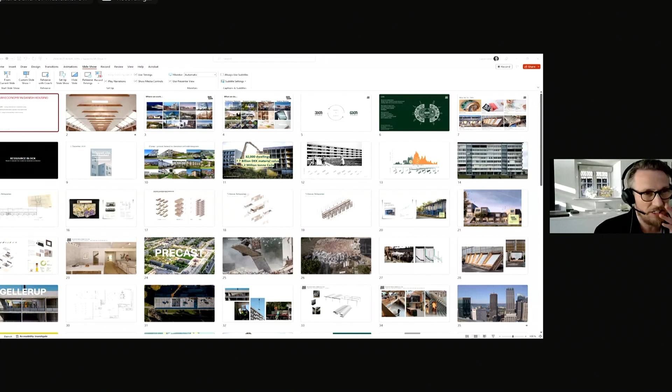Okay, thank you for inviting me, I will aim to be pretty fast here. Do you see my screen now, or my slides now? Not yet. Let's take a breather, we'll get there. I think we're seeing your screen, but not your slides. Let me try again. Here we go, Teams interface. Well, that's not too interesting. That's looking better. Excellent, do you see now? Yes, right, great, we've got the slide, all good. Beautiful, thanks, off you go. Great, thanks, technology is working, all good.

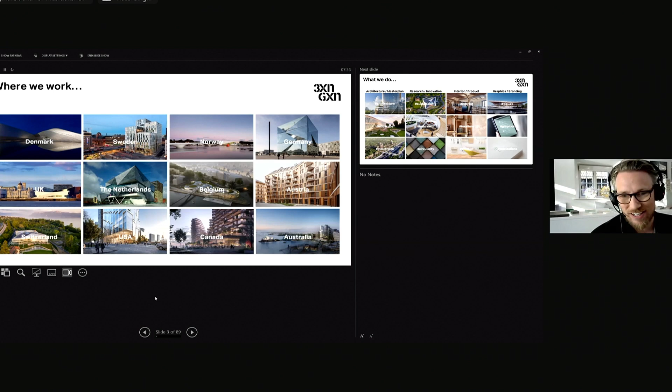Okay, thank you, everyone. I'm happy to participate here, and I'll give you a bit of an insight, a little intro of who we are, and then I'll dive into three research activities we've been doing here from Denmark around circular economy in housing and social housing especially. So just very briefly about who we are: 3XN GXN is an architectural practice established here in Denmark, now with 5 global offices, most importantly one in Sydney, and around 150 people working globally across different projects and places in the world. The majority of our work is cultural and commercial, also a bit of residential, and we work across the Western world and a lot in Australia as well.

We are a slightly different beast from most architectural practices in the sense that we do a lot of different types of work related to the built environment. Not only buildings, but also everything from product development to branding to publications and thought leadership.

We channel a lot of the work which is not traditional building projects through GXN, which is what I'm responsible for - our research and innovation unit in the office. The idea between 3XN and GXN is to take problems we find in our practice as architects and funnel that through research projects to come up with new ways of thinking and new solutions, but also have a feedback loop between research and practice, so our research informs our practice and vice versa.

What I'll talk mainly about today is our interest in what we call circular design and circular economy, which we've been researching for more than 10 years now. We started 10 years ago with a book called Cradle to Cradle for the Built Environment, and our thinking around circularity has evolved since then.

We're increasingly involved with research regarding the building stock from the 60s forward in Europe and the Western world at large. What's interesting is that we have a very large mass of buildings, roughly built in the rise of the middle class after the Second World War and from the 60s forward, that are now increasingly becoming unloved, out of their time, obsolete. This is a big challenge from a resource and climate perspective, and we do a lot of research around how to deal with these types of buildings.

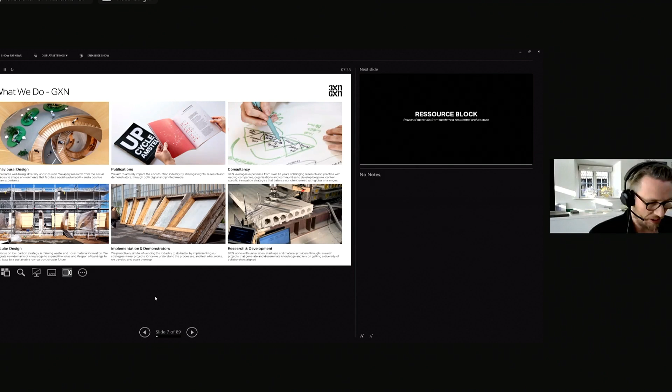So I'll give you a couple of examples, three projects. First is called Resource Block.

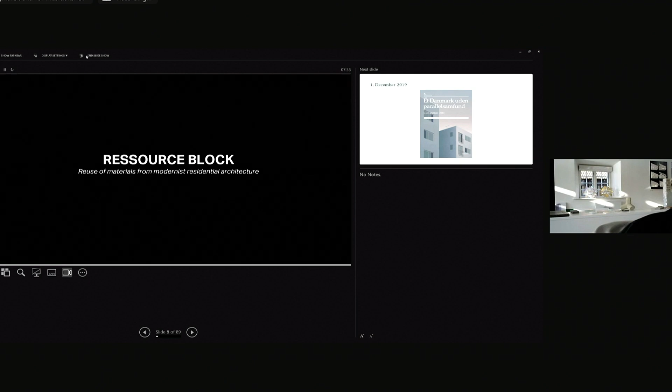All right, so let's see how we go. So the first example of a research project is called the Resource Block, and it deals with reuse of materials from modernist residential architecture that we have in Denmark.

The background for this research project is a political initiative called Denmark Without Parallel Societies, infamously labeled the Ghetto Package. It's essentially a political initiative decided in 2019 which deals with social housing areas in Denmark. It has a series of criteria that puts these areas on the list, having to do with socioeconomic concerns. And what happens if areas are on this list is it unleashes a plan to change the makeup of the housing in these areas.

So essentially demolition of part of the areas and building new in the same areas in order to change the typologies and change the ownership models to make more diversified areas. So I would say it's a very controversial political package for many reasons.

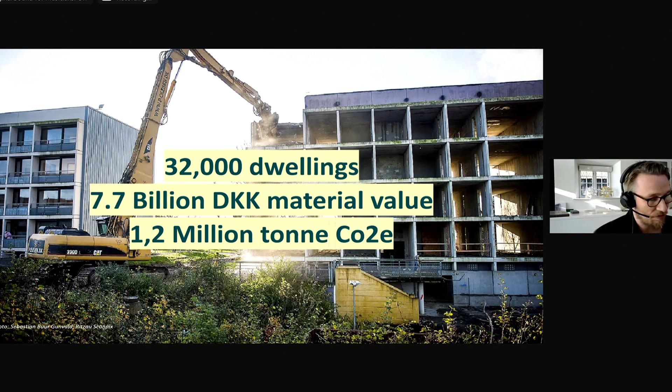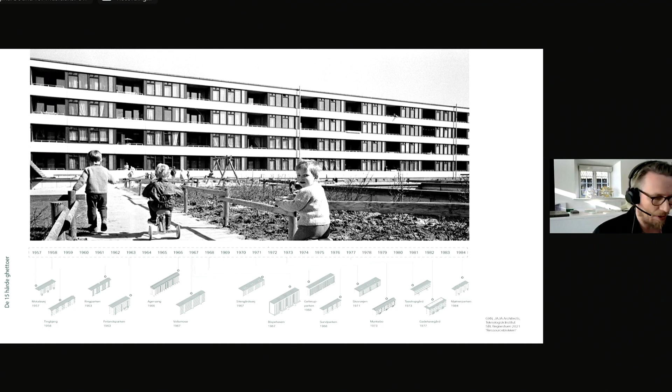So this is just a scan of the buildings in question and when they are built. What's interesting about these buildings, when you study them, is that a lot of them are actually built in the same way - they're prefab element concrete construction, and they consist of a lot of the same materials.

This is one example of a building that we studied quite deeply, which was set for demolition - it's demolished now. But you can see this fairly typical 60s, 70s prefab assembly line type architecture that was built quite fast in order to provide housing for people in a housing crisis.

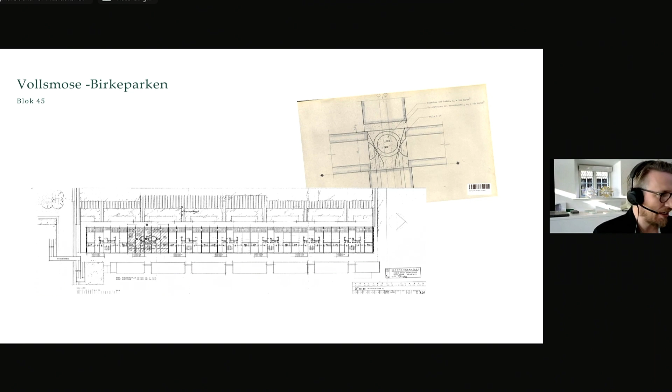So what we did was we went in and studied how the elements were placed, how the connections were looking. We studied the quality of the materials, both in terms of toxicity and the structural capacity of especially the load-bearing elements of the houses.

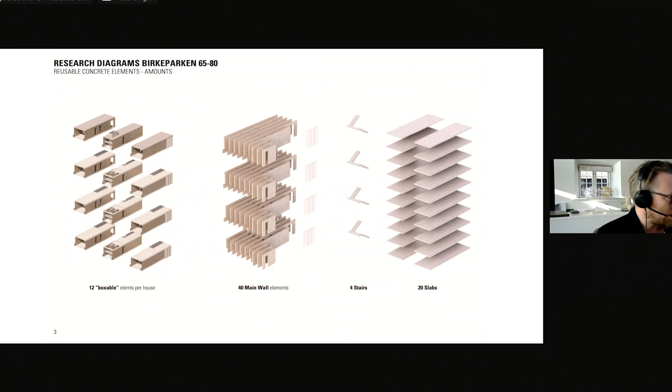Essentially what we did was we made a material bank, a model that described all the potential materials. We worked together with demolition contractors on understanding what types of elements we could likely get out, what the demolition sequence would be if we wanted box elements, wall elements, and slab elements. So this would be a kind of material bank of the whole block.

And then what we did was we gave that information to a series of architects and asked them to see how much of this they could reuse in the design for new buildings in the same area. Because what is happening is that they're demolishing the social housing blocks and replacing them with more low-dense typologies. This is a quite beautiful example from one of our colleagues here in Denmark.

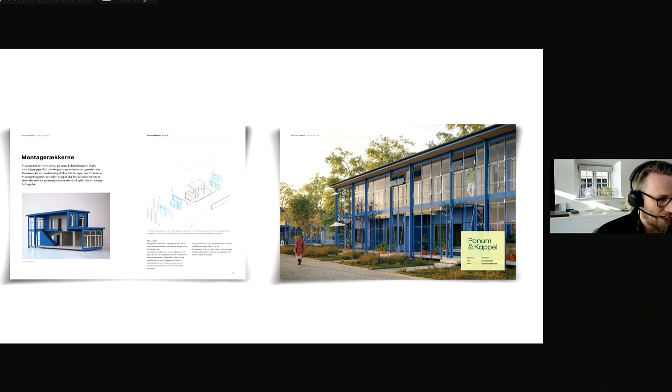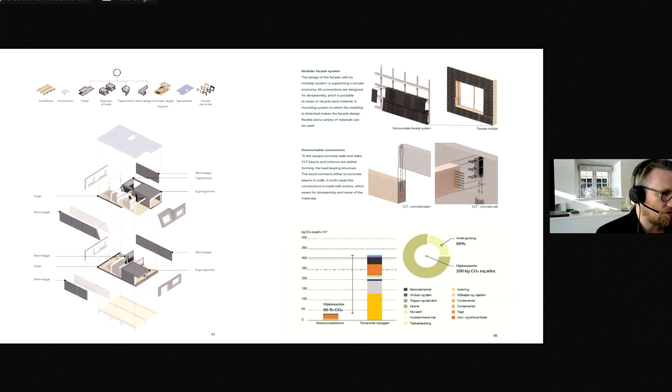This is our own design of a row house typology, using a lot of both the box elements and some of the slab elements. And here you see that we calculated that from the materials part of the carbon equation, we would be able to achieve something like an 80% upfront carbon reduction compared to a similar new-built house typology.

This is just a render we did, showing these interesting meetings between materials - the new timber structure and the old slabs, planks and wall elements used in the architecture. So it was a kind of discussion piece.

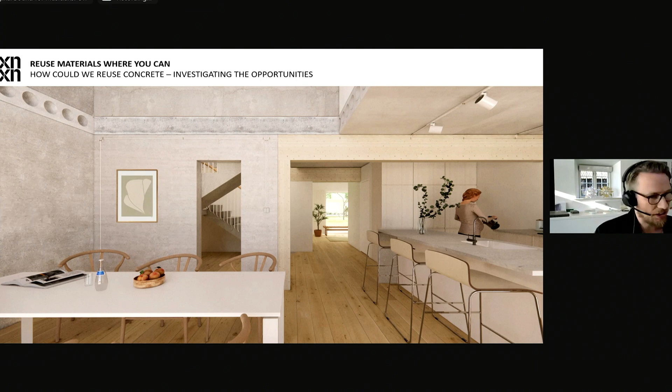You could say, well, what is actually the potential of these kinds of buildings as a material bank? We continue to look at that, because one thing is the principal potential, the other thing is the practical reality of actually getting the materials out in decent quality.

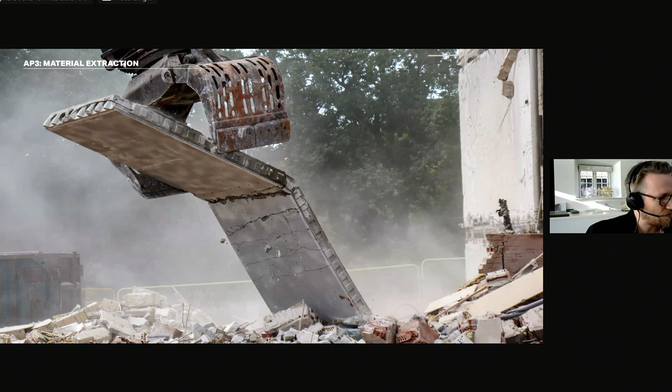Here's just an image from one of the tests done with the demolition contractors, and of course it's not easy. The first test we had, we were able to salvage something like 20% of the hollow core slabs here. The rest was actually destroyed.

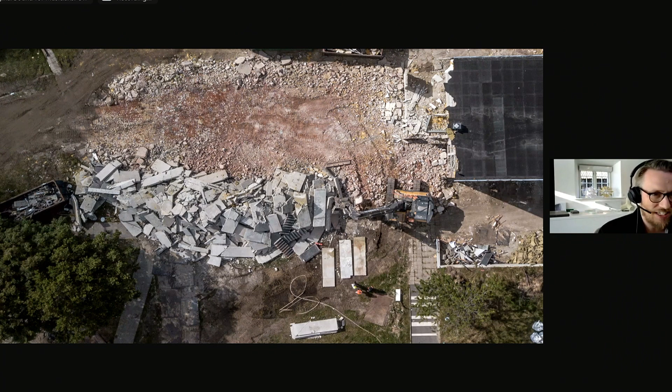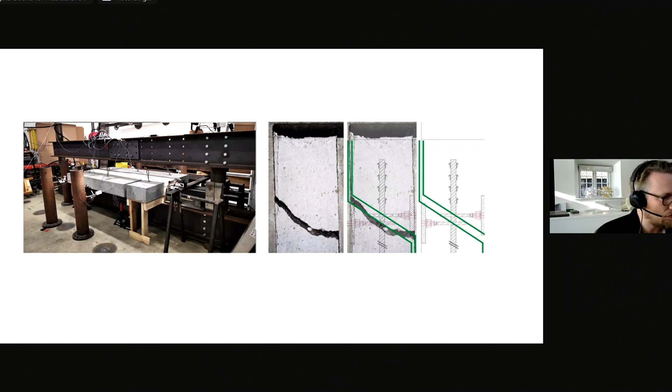But working with both testing how to store this and how to take it apart, and also what would be the quality of them after you get them out, we were able to figure out a way to essentially get them out in a quality so that they can be reused again.

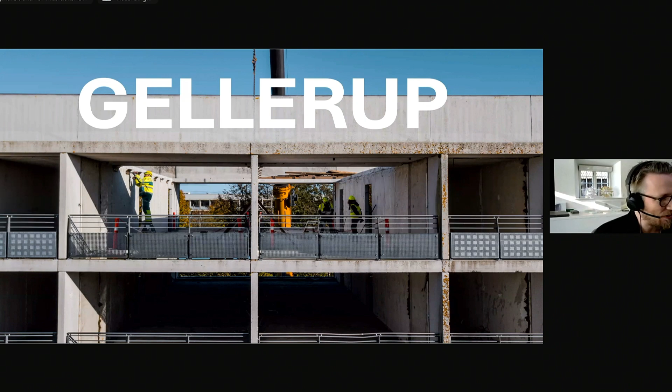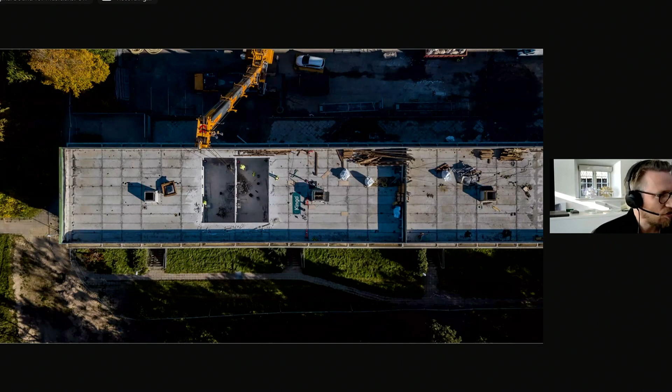So we are currently working a lot on understanding some of the next projects which are going down. The interesting thing is, as I mentioned, they are very similar in building technique. So once we begin to understand how to deal with this, you can see it's beginning to look much more organized. We are beginning to understand how to store these things so they don't break.

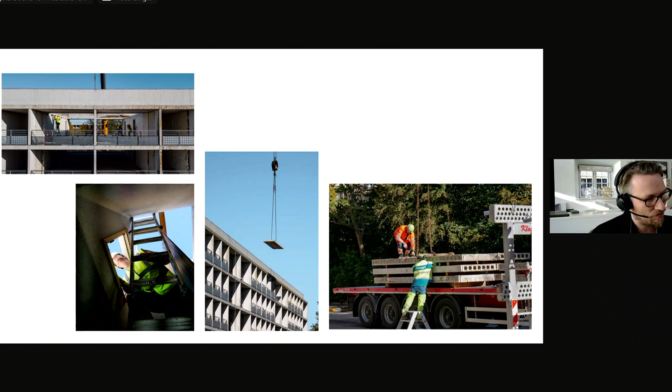And we are beginning to understand what level of work it requires to get them to a condition where they can be reused. And this is our latest attempt to build them in.

It's a transformation project that we finished in the outskirts of Copenhagen, an old warehouse, where essentially we built the mezzanine out of these old hollow core slabs that you see here, which are now actually working quite fine and can be used as a kind of second life, let's say.

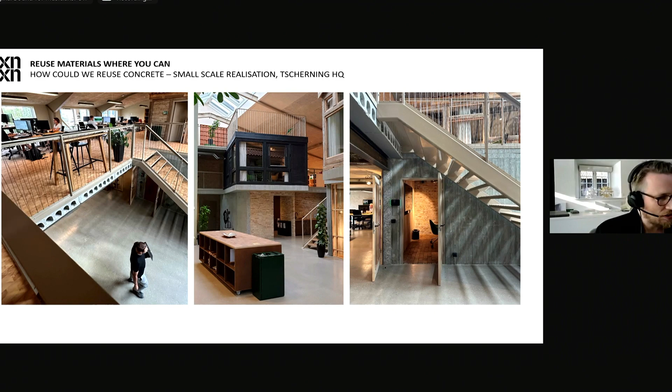Probably one of the most complex and thoroughly thought through transformation and circular projects in the world is probably the Quay Quarter Tower in Sydney, where it was more about reusing the structure as it is, which from a carbon perspective is even better.

So I'll jump onto what to do with all the new build houses, and how we in a way prevent some of the things we're seeing happening with houses from the 70s, where they are quite hard to change and adapt to the demands of our time.

This is a research project we did with 5 countries in the EU, very much related to the circular economy policy which is part of the EU taxonomy, a piece of policy put on investors to meet their ESG requirements. The taxonomy talks a lot about enabling buildings to be prepared for material recovery.

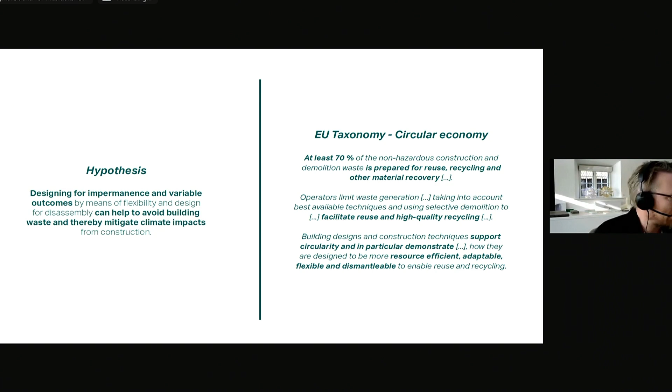Our hypothesis when we started this project was that all this housing we're building in Denmark and the Western world generally, due to urbanization, has very little capacity to change in the future. We think this is a problem from a resource perspective.

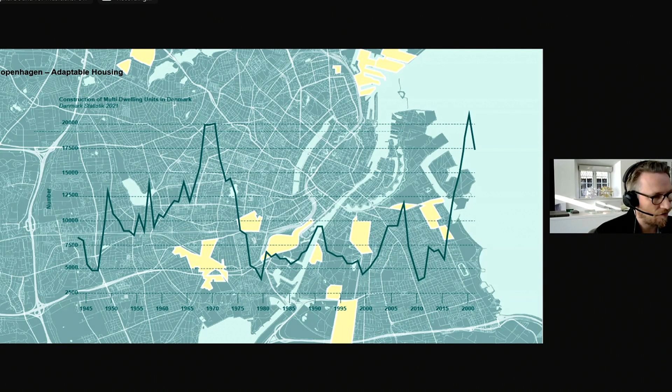So we studied where in Copenhagen the main development areas are, and how many units are being built. We see it goes up and down, but we've been at quite a high note in recent years, with a lot of new construction of residential projects. What we don't want in the future is what we're seeing: the general average lifespan of a building in Denmark is around 60 years.

It's a bit lower for housing, but what we see is that the materials are actually often very fine, they could stand for much longer. But there's a lot of change happening which is not driven by the material or technical quality of the buildings, but rather socioeconomic or market changes, a bit like we saw in the social housing projects, where it's not so much about the buildings themselves as a political desire to change the social makeup.

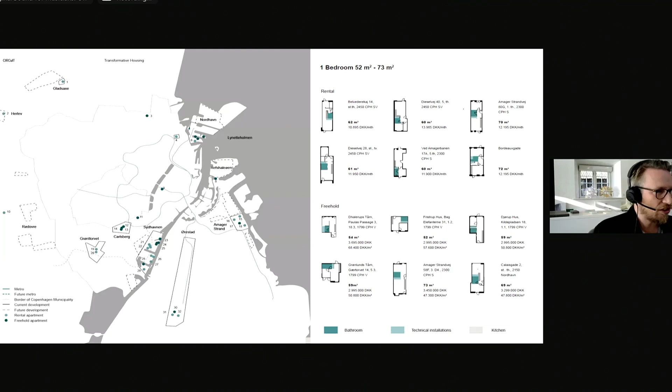So we studied the plans of all these new residential projects: how are they built, how are they looking. It's quite interesting when you superimpose them on each other.

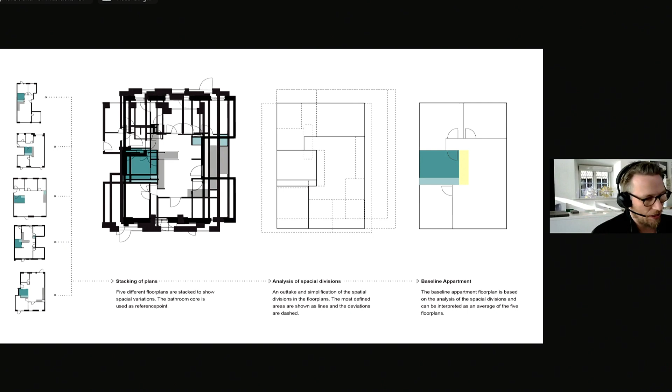What we found was that they're almost eerily similar, which on one hand, as an architect, is slightly depressing, but on the other hand it's also potential — a lot of what we're building in the residential sector, both freehold and rental, and to some extent social housing, is very similar because it's tailored to a very specific market and demographic situation.

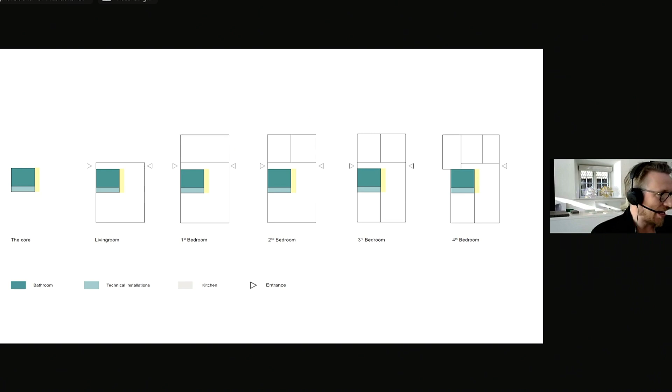So in a sense we developed an archetype of a building, then studied how much this actually covers of the new buildings being built, and then looked at how it's built, and the demountability and adaptability of how we build today in Denmark.

What we build is similar to how we started building in the industrial revolution, with hollow core slabs and prefab concrete elements. But from a demountability and adaptability perspective it's not very great, because everything is glued together — all the layers of the building are inseparable from each other.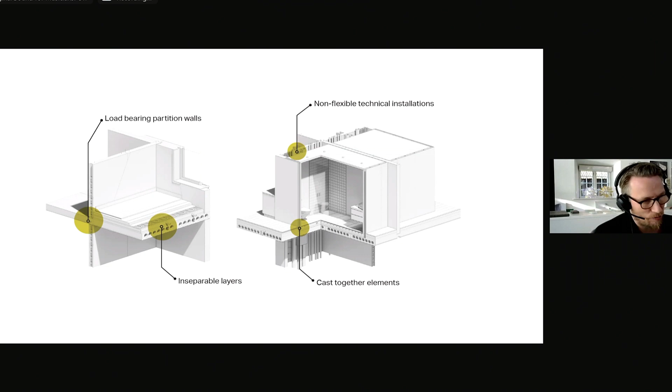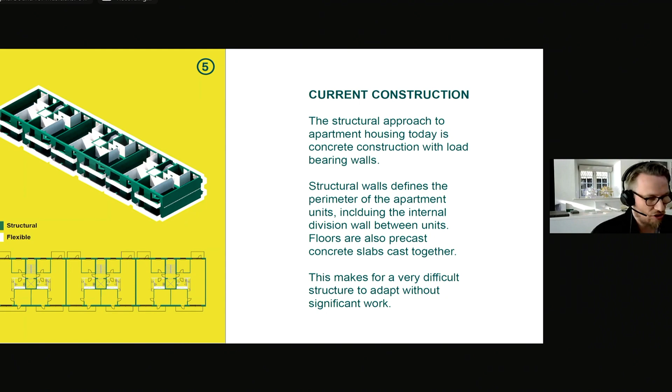So based on that basic apartment typology, we developed a building system that in a way goes back to a more old-school way of building, where structural loads are dealt with in columns instead of load-bearing walls, and in cores. This shows how, with this building system, you could much more easily adapt to either bigger apartments or potentially other types of typologies, in this case a commercial typology.

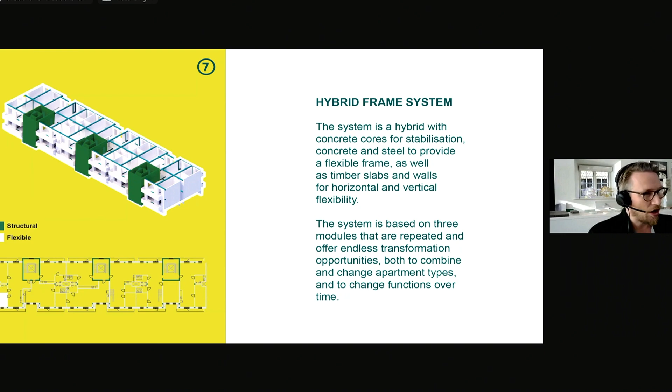So that when you build, you begin to think about the transformation capacity of the housing units you're building. This isn't really on the agenda for a lot of developers in Denmark — it's not something they're thinking about. So this was a bit of a provocation to ask: how can we enable our buildings to be much more multifunctional?

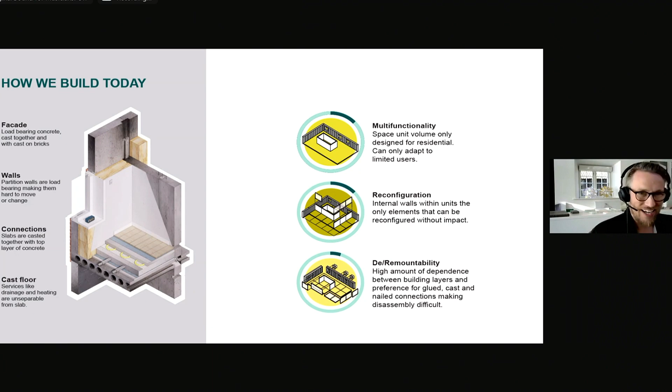How can we enable them to be reconfigured in the future? And ultimately, how do we enable that if it comes to it, so they can be demounted or remounted, and it will be easier to take the materials out and reuse them should the market situation essentially change.

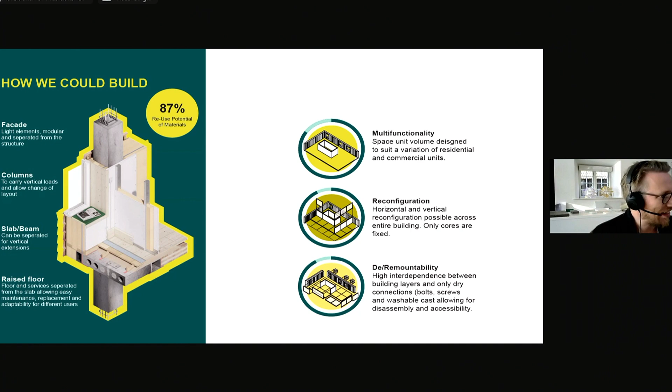So this was how we built today, and this is how we could build. What we calculated was that from simply moving away from some of the very cast connections we have in buildings today, moving towards a hybrid system with timber and concrete, we could enable an 87% potential reuse of materials. We did various types of life cycle cost calculations, and what we can see is that there was a slightly higher upfront cost, but as soon as the changes of the cycle begin to happen, this is where this way of building really pays itself off. Which is, of course, one theme we could discuss.

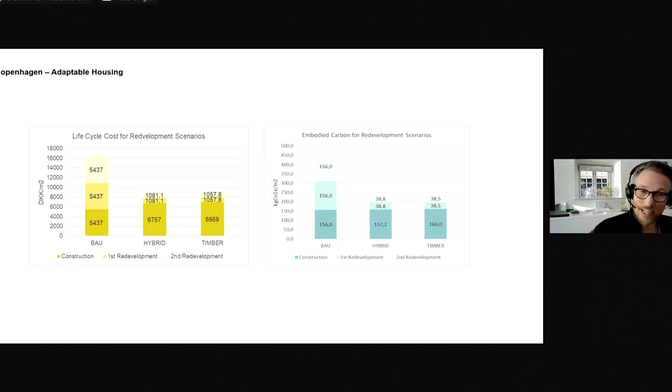So the last project I'll show is really quite technical design, again for adaptability. It's in a way taking some of these ideas and trying to implement them in the market for social housing.

The way social housing works in Denmark is that social housing organizations develop social housing projects and then operate them as non-for-profit organizations. And they have a cap, depending on where it is in the country, for how much they can build. So essentially, there's a fixed economy.

And we went together with one of the largest social housing providers in Denmark to try to do a concept for what we call Circle House. The idea in Circle House was that 90% of all materials should be fully reusable. So we should build on market conditions with the way that we build social housing, but in a way so that we enable this kind of circular future.

So it's a very big industry collaboration with a lot of companies delivering solutions and knowledge on how to make this happen, and also a collaboration between a lot of advisors and different architects. So it was not our design or our project, it was more like an industry push to understand how we can do this.

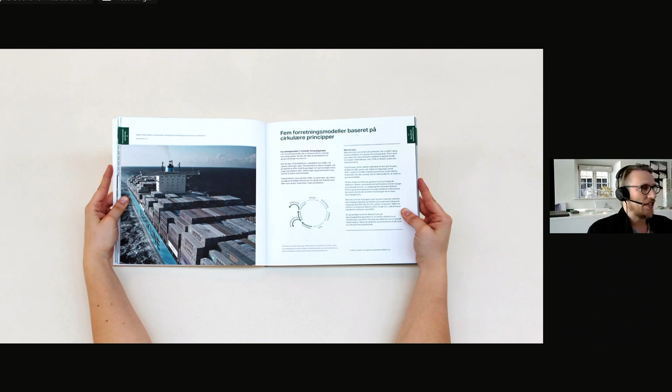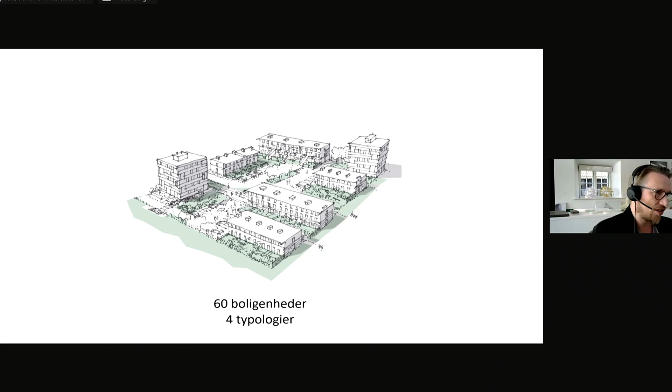It is outside the second largest city in Denmark, Aarhus, in a new build area outside there. It's these 60 housing units with 4 typologies. So essentially, the project itself is showing, you could say, 4 different ways of constructing this social housing. This is just an illustration of some of the facades.

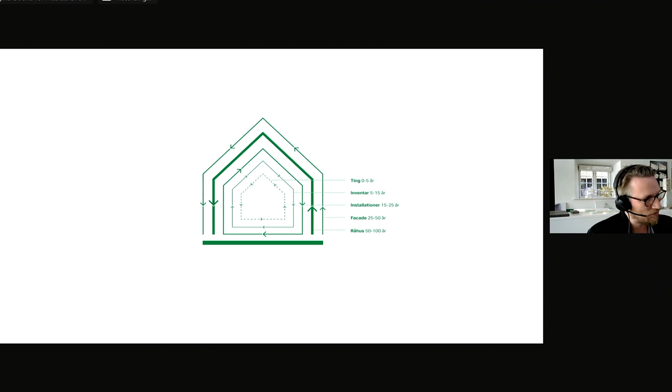And as I mentioned, we built it up based on this kind of layer diagram to say, well, we need to look at each building layer in order to understand how they are separable from each other. How can we design them so that things are not glued together, but can come apart. And I'll mention one of the big ticket items, both in terms of carbon and resource use.

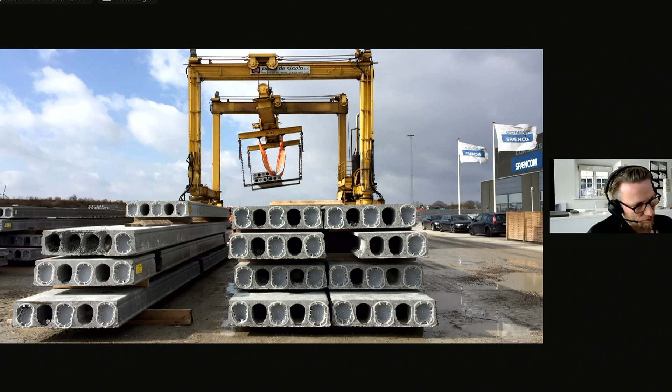Which is these hollow core slabs that we always use in Denmark, and which I've been talking a bit about, because those were in a way some of the hardest things—the superstructure of the building, the concrete elements.

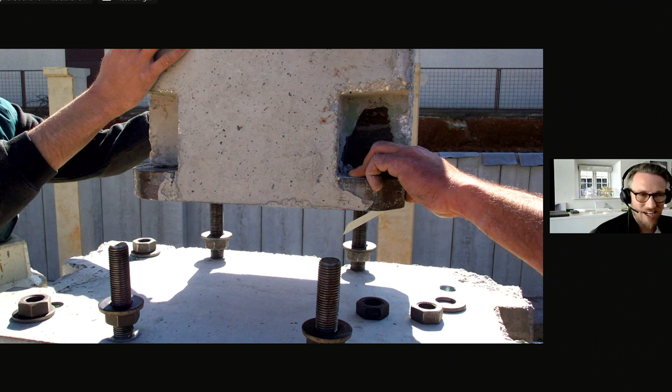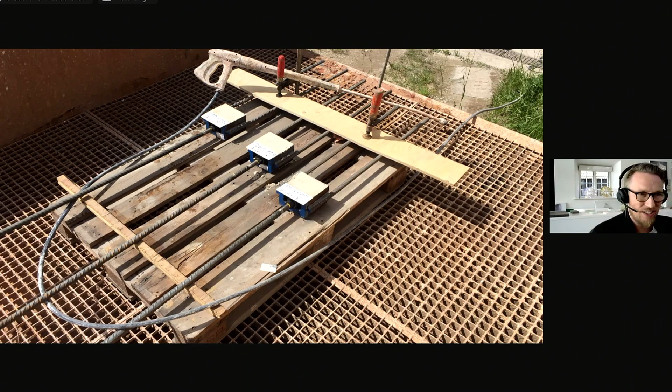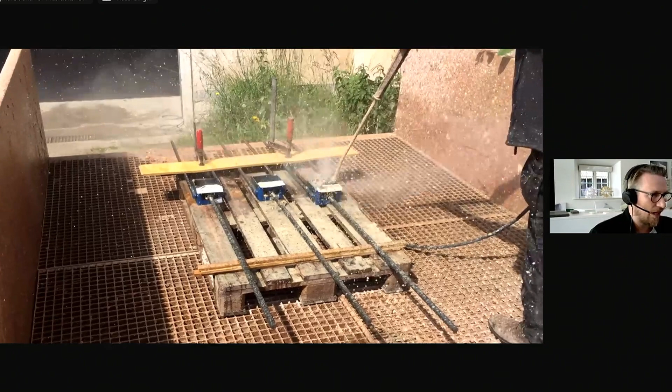And what we did was, together with industry partners, we developed almost like a mechanical system of putting this together. And then instead of casting that out with cement-based mortar, we used a lime-based mortar, which essentially enabled us to fire hose the connections, because you have to cast out these mechanical connections in order to secure for fire and soundproofing. But we were able to do that with lime-based mortar, so that within a few seconds you're able to get the joint clean, and then you can assess it.

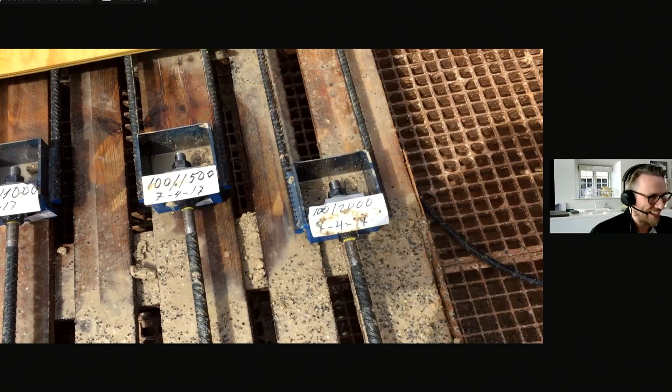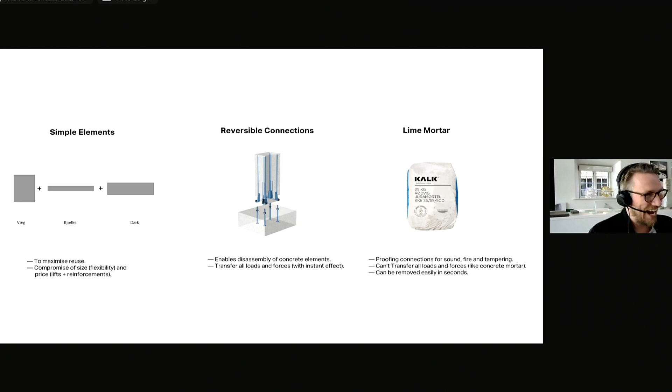So this is essentially how it works. It's very similar in many ways to how you could build houses today, but we've harmonized all the elements so they are really simple: a wall element, a beam element, and a slab element. You can build all these four housing typologies, and in between those elements it's filled in with light buildings, timber-based construction, with reversible connections based on lime mortar. Here you see how these three elements stack up and become a building system that can then be filled in with either windows or light wall elements of timber.

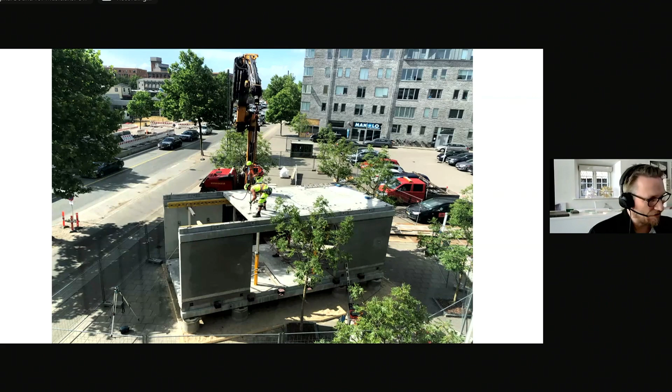And here's the mock-up that we built together with Lejerbo, the social housing company, where you see some of these solutions. We had a bit of a play with how the facades could be done.

This is post-consumer plastic shingles. We also used these brick-type panels, which are also demountable, just fastened with a strip on the backing. And various kinds of funky materials, burnt leftover timber from the metro construction in Denmark, and cork, which can just be screwed off the facade. A lot of things we don't normally use in housing projects, just to show that there's a material paradigm out there which is ready to be explored.

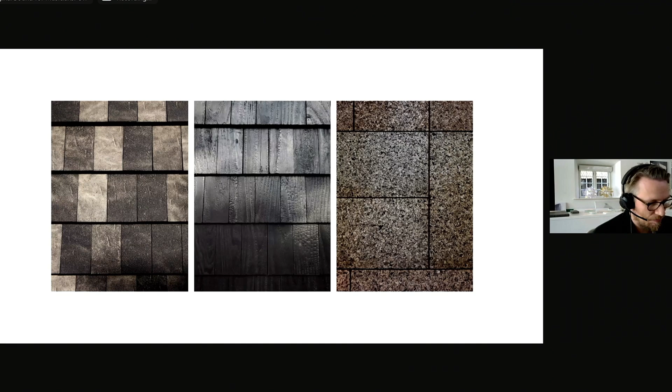The status of this project is now that it was tendered out. After we did the research project, we went on the client side and tendered the project out, and there was a winner of the tender, and they are now preparing to build the project based on these principles that were developed through research.

And this is some images from the mock-ups with a lot of the materials we used. I think that was all for me. I hope I roughly made it on 30 minutes.

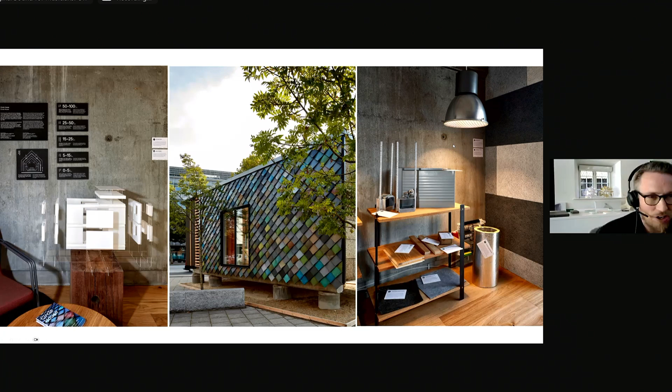Look, thank you very much. I'm going to invite Ralph and Alison to join me on the stage here as well. And while they're coming up, Lasse, I've just got a quick question for you just about that last project you showed us.

The Circle House project. Obviously, there was a prototype unit developed. You had the exhibition, a book, a whole range of collateral material around that research. And you did mention that it is proceeding soon with a tender process to deliver a project. But can you reflect a little bit on the role of research and of exhibition, the publicity or the engagement process of it, and what role even just the fact of building a tangible prototype played in changing perception or influencing new practices.

Yes, sure, I can. For me, when we do these research projects, it's incredibly important that we get a physical manifestation as well, that as much as we can, we build something that people can go and see and kick the tires on a little bit. All of this is an ongoing discussion about what we find most important in the built environment, and by having these types of research projects and demonstrators, we get a physical manifestation that can be tested, but also can be almost like an armature for that discussion.